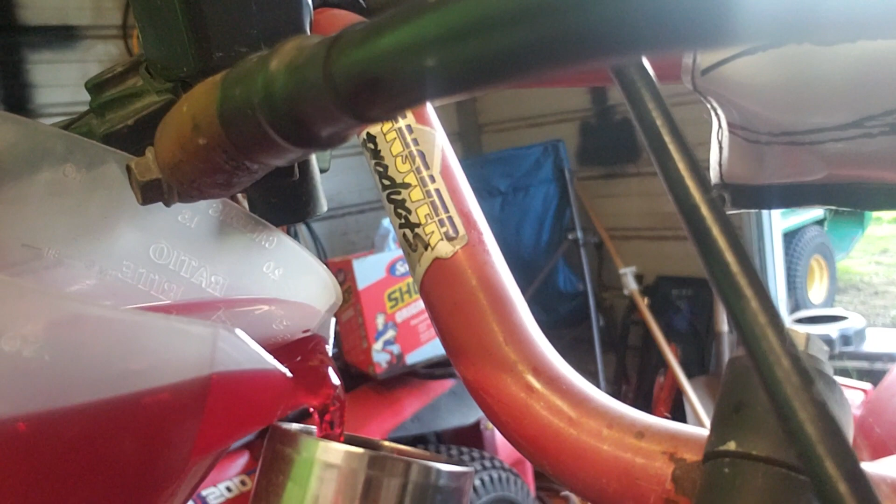Honda calls for 465 cc's worth, which is what we're going to be doing on this machine. You got the ratio right here, and I still have the plug out of the left fork, so we'll go ahead and pour this into the right fork here, trying to be very careful not to make a huge mess all over the place, and we'll just slowly dump her on in here.

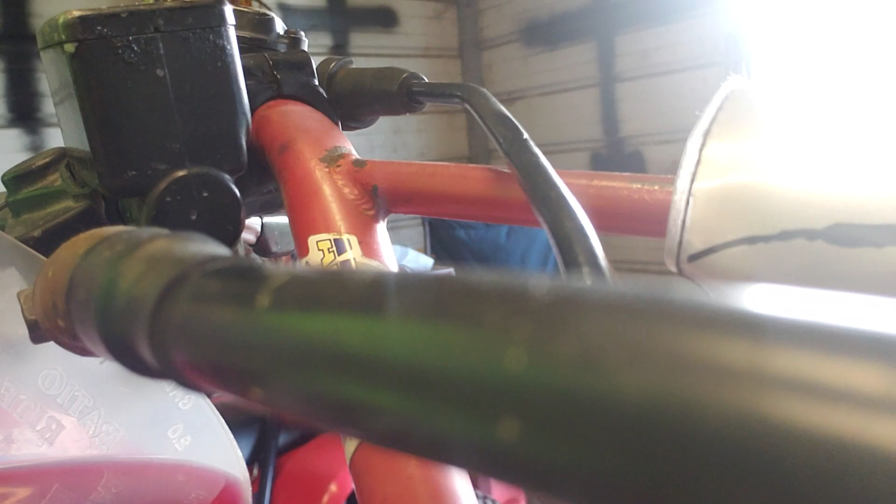Should listen to the idiot neighbors next door mouthing off.

Pour it on in here nice and slow. I might have to get a funnel. I think I'm gonna need a funnel to finish her off. So I still got a lot of red Kool-Aid left in there.

So ladies and gentlemen, that was just a quick go over on how to change the fork oil in your 1985 or 1986 Honda 250R ATC. Now, be warned that the 85 and the 86 forks take a different amount of fluid, and there's a different method of checking them as well.

You see, if you look here on our handy dandy Honda manual, factory manual as I might add, this ain't one of those Clymer jokes, which are still very good.

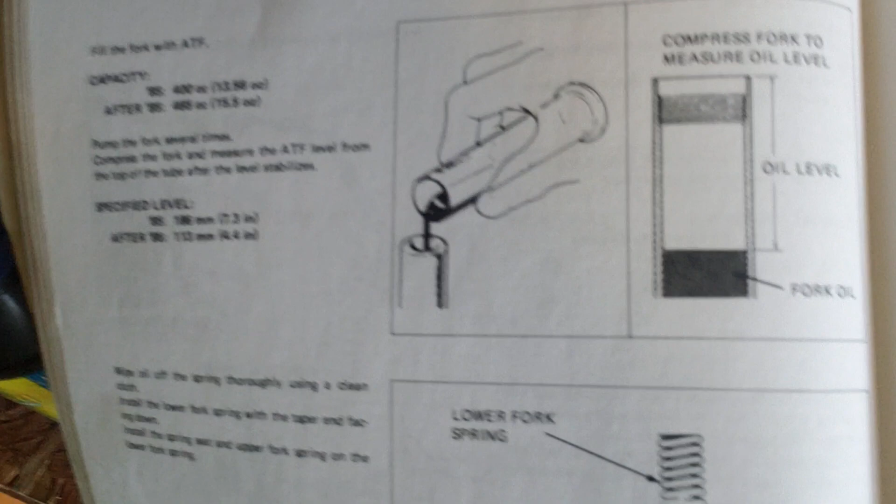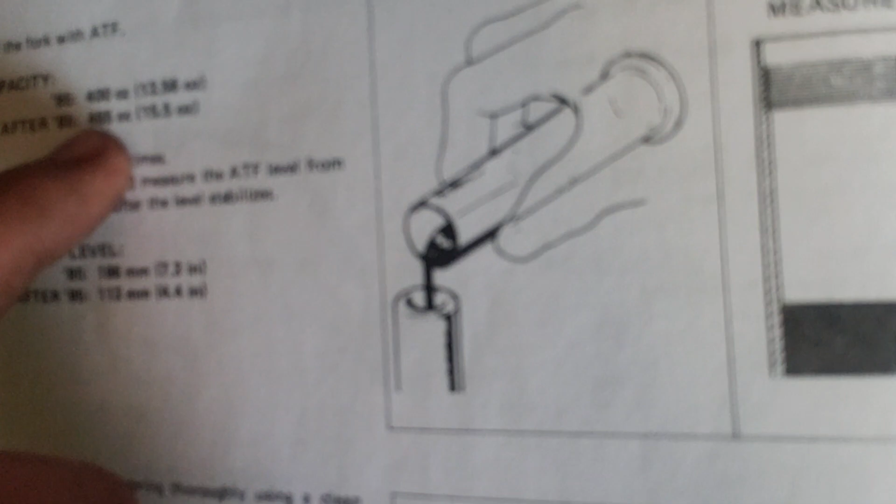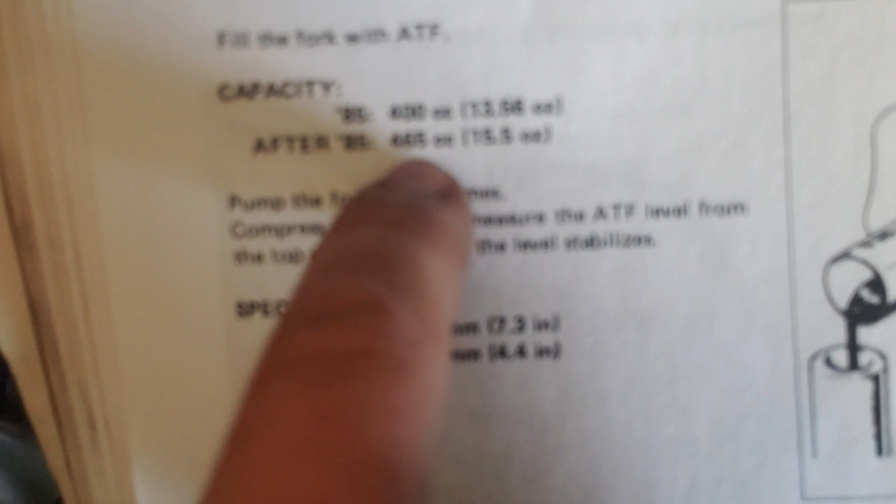Capacity on the 85 is 400 cc's, about 13 and 56 hundredths of an ounce. Then you go down here to the after-85, which would be the 86, the only other ATC after 85 as far as the 250R lineup goes - 465 cc's. See that? 400 versus 465 cc's, about 15.5 ounces for us American folks.

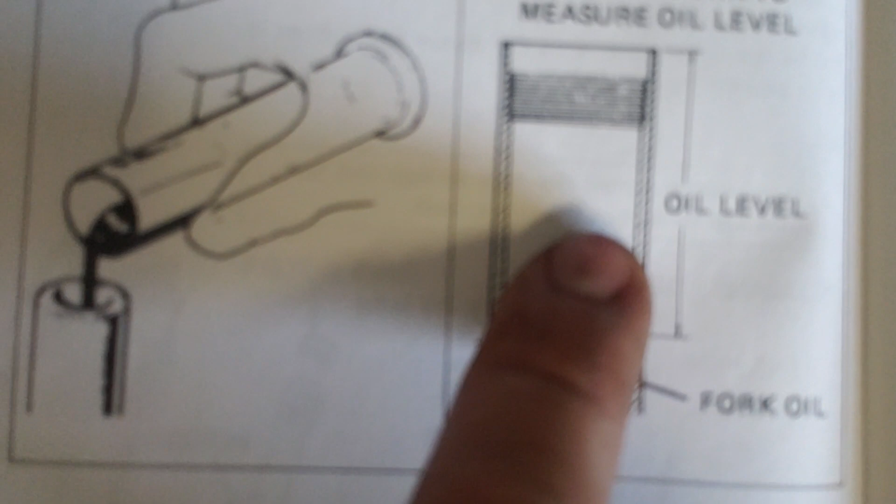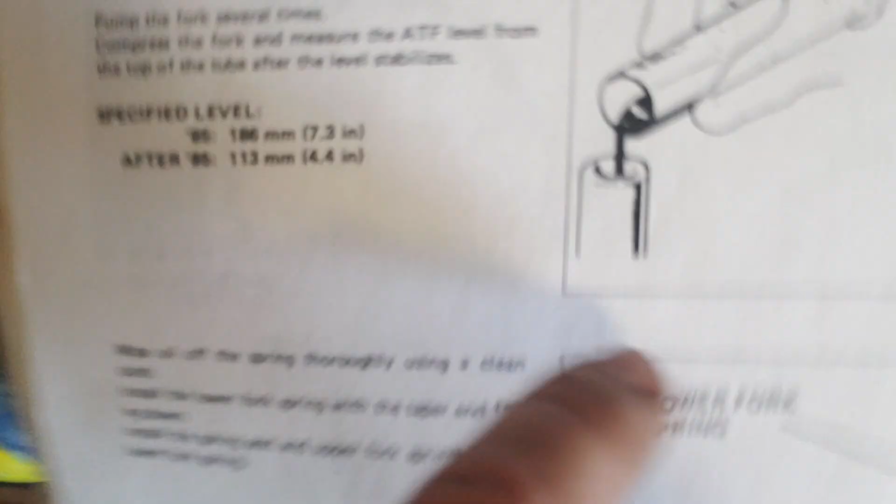Then if you look, this is how you're checking the level right here. You look at the top, compress your fork, and then you measure from the top to check your level. You'd be about 7.3 inches from the top on the 85, about 4.4 on the 86. So they're calling for more fluid on the 86. That's pretty much what it boils down to.

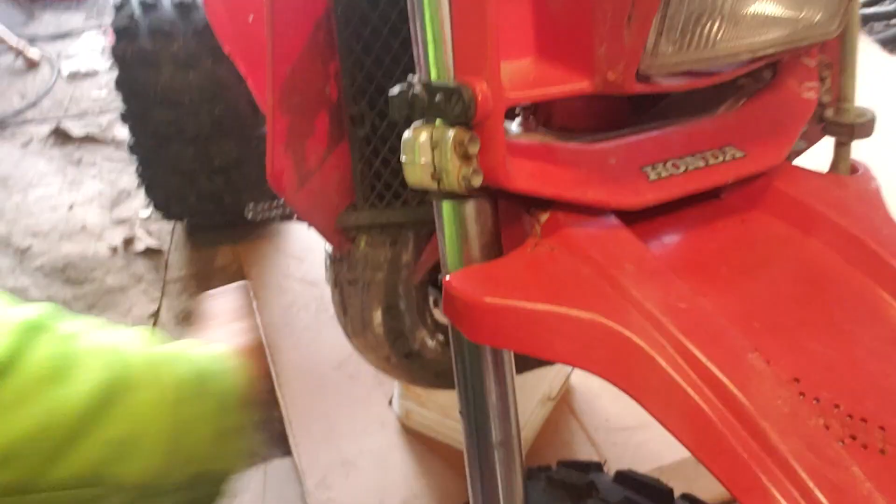So ladies and gentlemen, I hope you enjoyed this video, and I hope you got a masterful lesson on changing your fork oil. Another good thing about the front forks on any ATC - run fork boots. This sucker doesn't have them, that's probably why the seals are all blown out. Alright, get out and ride your ATCs.